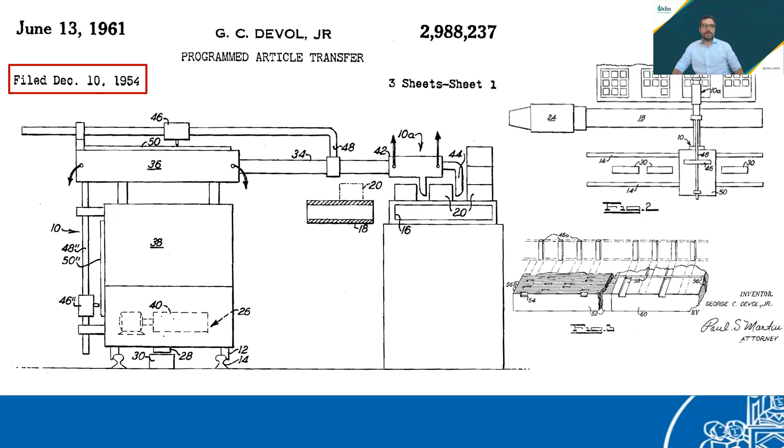This is a milestone of robotics in 1954, one of the first patents on a robot, programmed article transfer. Who is responsible for this patent? That person you see here on the right, George Devol. George Devol founded, together with Joseph Engelberger, the Unimation Inc. in 1962. Is it a great company? Yes, it's the first company in robotics, responsible for the Unimate robots.

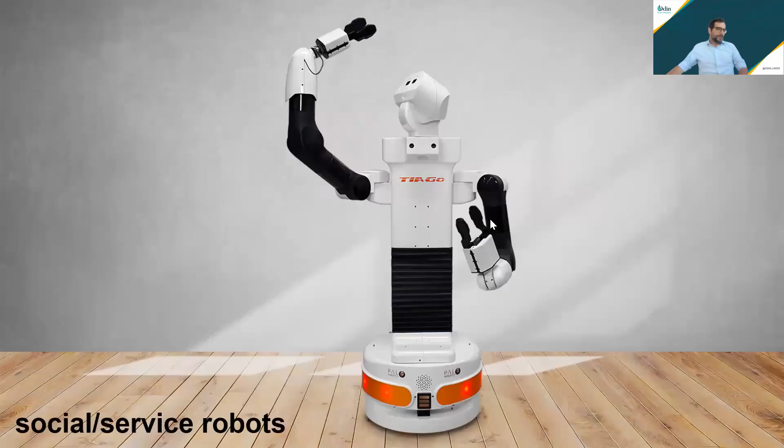The topic of this call today is not anthropomorphic robots. I will focus on social and service robots, and in particular I will provide solutions for delivering robots working in hospital environments, in order to help shape the future of the hospital.

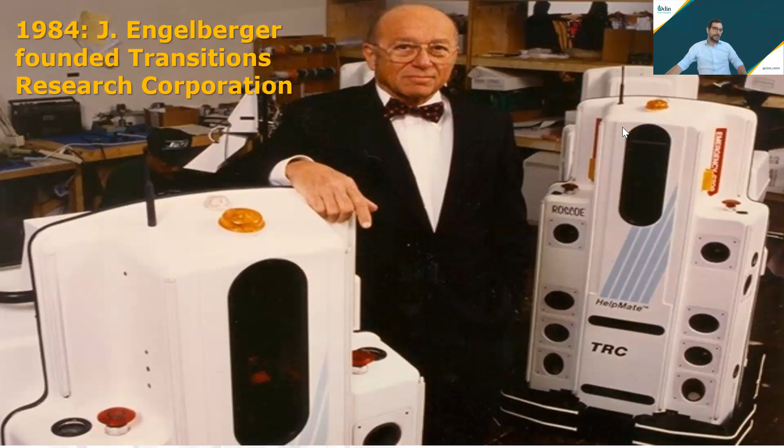Let me make a step back. This is the same person I presented before, Joseph Engelberger, who in 1984 founded another company called Transitions Research Corporation. You see on the background some mobile robots, four of them, and this is the HelpMate robot. These robots were on the floor of the company I mentioned, and this is a picture from 1993.

So why am I saying that? Because I like very much to know about history. It's important to understand the reasons why today I don't see that technology as consolidated as I would like. The question I'd like to discuss, to solve together, is: why, almost 30 years ago, did we already have great robots with functionalities for delivering consumables and items in hospitals for logistics purposes, and how do we improve them and solve the open issues that started with these robots in the past?

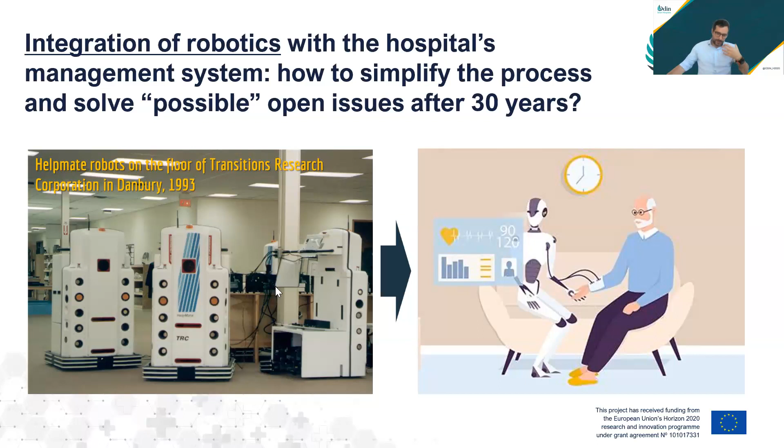So, discussing this within the ODIN consortium and with other colleagues, we decided to create, and then test in the great piloting area hospitals of the consortium, a new robot for logistics—one that is not a robot full of technologies.

It's a robot that started from a smart idea and from the needs of practitioners and hospital management systems. This is a robot integrated within the wide digital infrastructure of the ODIN European project, an example of a robotic satellite connected to the complex digital architecture that is the aim of the ODIN project.

So what are the features of this robot that are different from what's available today on the market or in research? We decided to create a smart component within a smart component. The robot itself is the system delivering what we call the smart rack, and the smart rack delivers the smart boxes. So it's a system transported by a mobile robot, and this infrastructure is generalized to be compatible with different mobile robots.

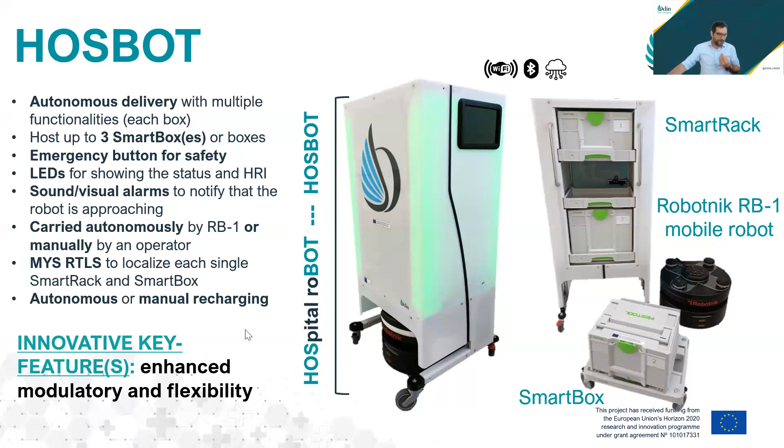To better explain the features of this system, I'll show a video that will take a few minutes of my presentation. What you see here is the use of the HOSBOT robot - yes, this is the name of the robot - in a real, realistic environment simulating a hospital scenario.

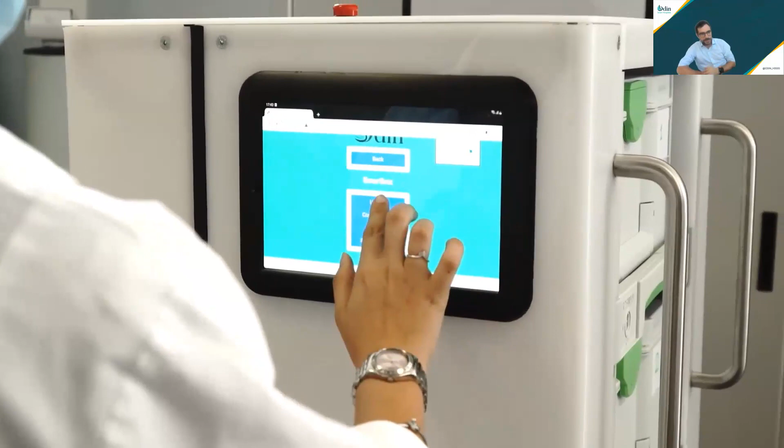As you can see here, this is just a tablet mounted on our robot, and this is the front end for connection with the ODIN infrastructure. What the doctor is doing now on our system is unlocking the box in order to have access to a secure environment.

So right now there's no robot present. The robot will come. What that person is doing now is using a smart robotized box for tracking, identifying, and loading different consumables - we're just putting in consumables that are tracked by our magic box.

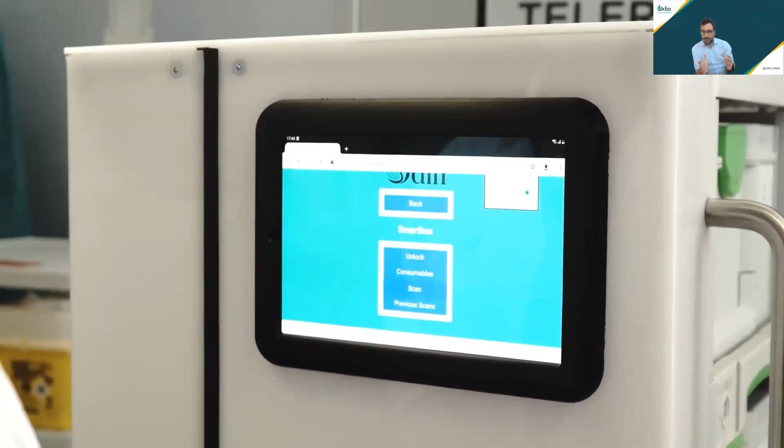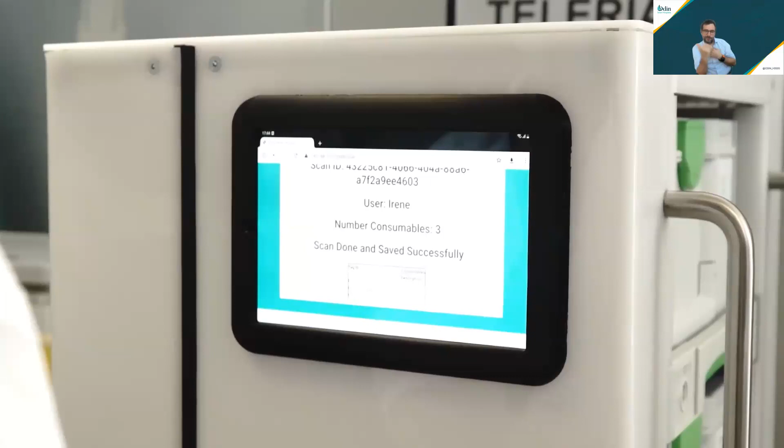The boxes we call smart boxes are part of a smart rack. Why a smart rack? Because it's the rack that powers and enables access to the different boxes. Here you see an example of adding consumables for tracking and transporting them to different wards of the hospital, planning to have the right consumable in the right place at the right time.

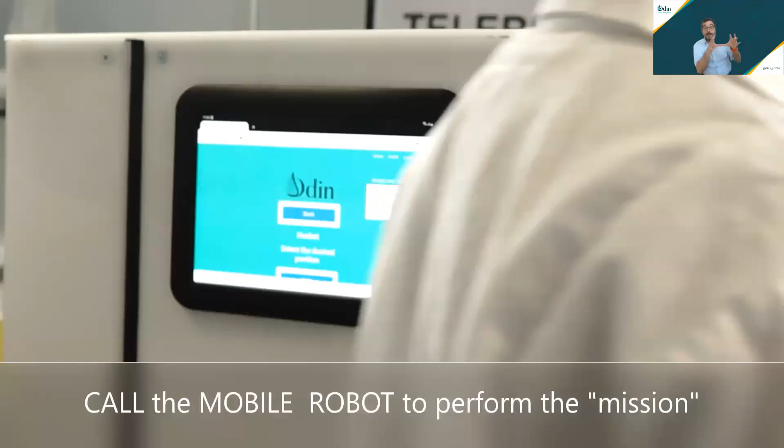But each box can have a different functionality. Now the operator calls the robot. So it's one robot for different racks - one robot serving different smart racks. Why? Because the real cost now is in the mobile robot.

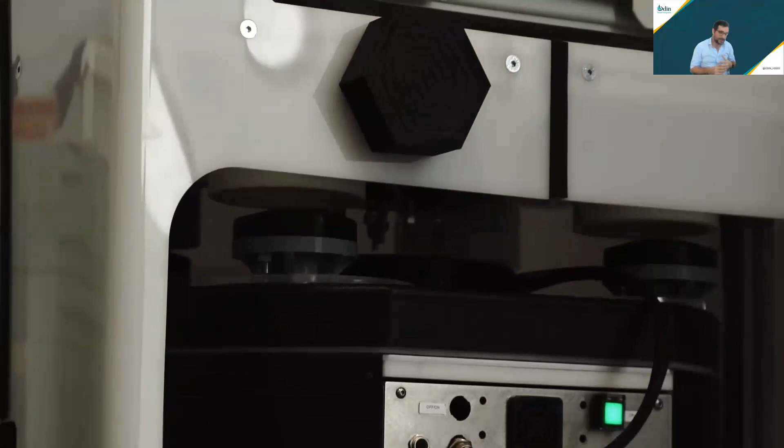And I'm sure a robot isn't working 24 hours a day, 7 days a week as the same single robot. So the smart idea was to have several low-cost smart racks and boxes that you can change as you like, and then maybe just a few mobile robots managing the different transportation tasks. That's the point.

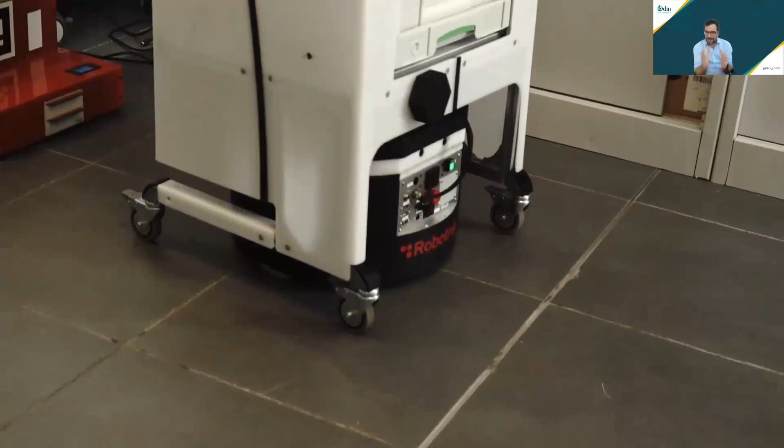We also want to increase the potential impact by reducing the barriers to entry - and cost is one of them. But not only cost, because when a director sees that the robot she purchased isn't being used, she's not happy. So we want to say: do you need one rack?

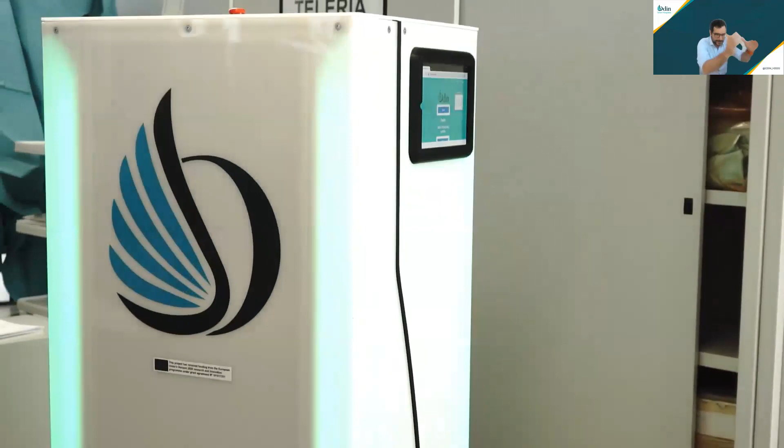Yes, take one rack, and then take one robot. If you need more racks, if you need more boxes, that's what you'll purchase - creating a proper strategy, also considering fleet management strategies to use fewer robots for more containers, more boxes, more racks.

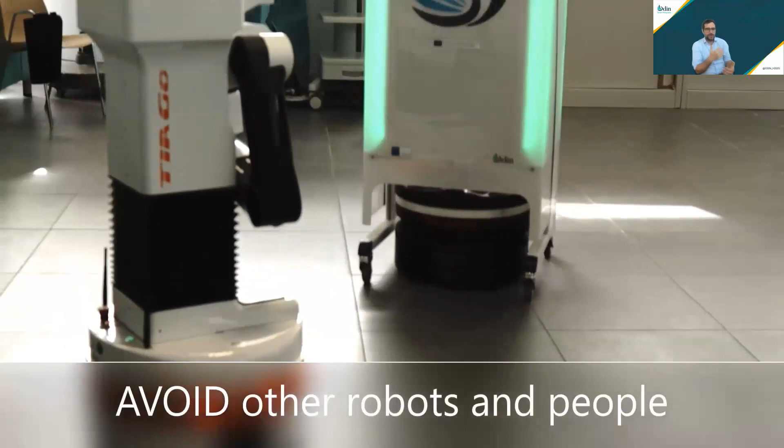The robot is of course provided with collision avoidance, so it doesn't go against other robots or against humans. It moves by replicating the behavior and speed of practitioners. We're also working on creating a proper social aura around the robot to make it compliant with a hospital environment.

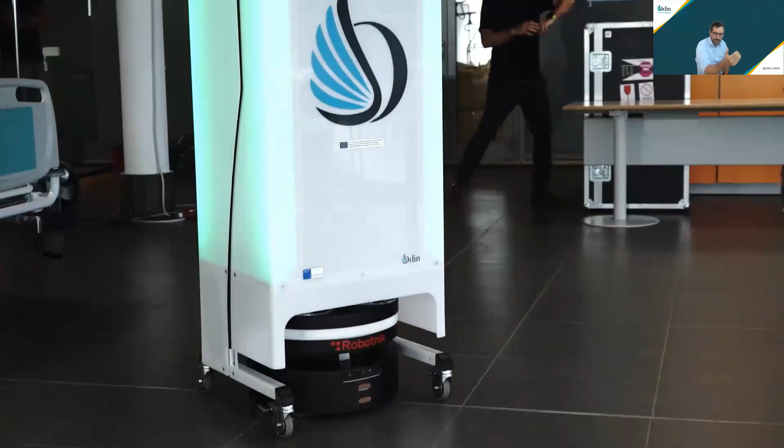What you see now is that the robot was programmed to reach another place autonomously. When the robot reaches the final place, another practitioner can go there, or may already be there, access the system, unlock the box, remove the consumable, or use the boxes as she prefers.

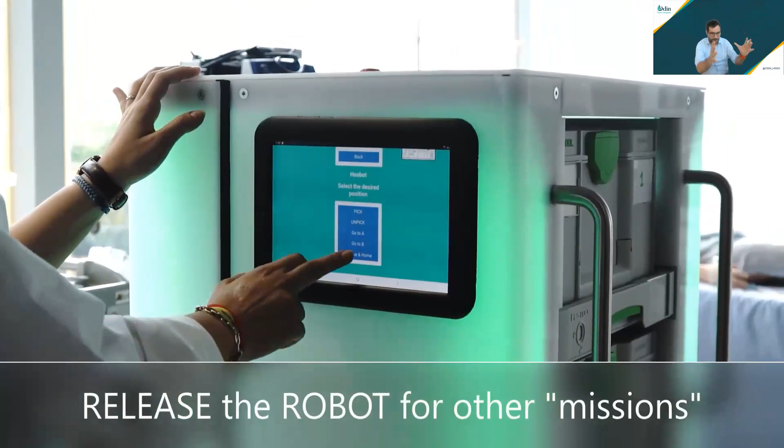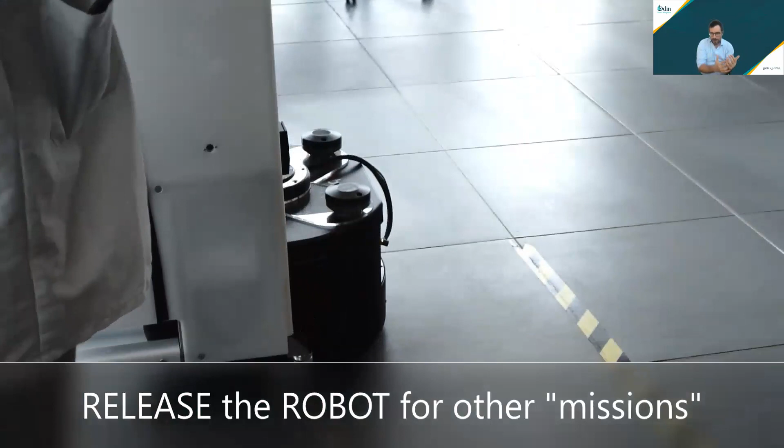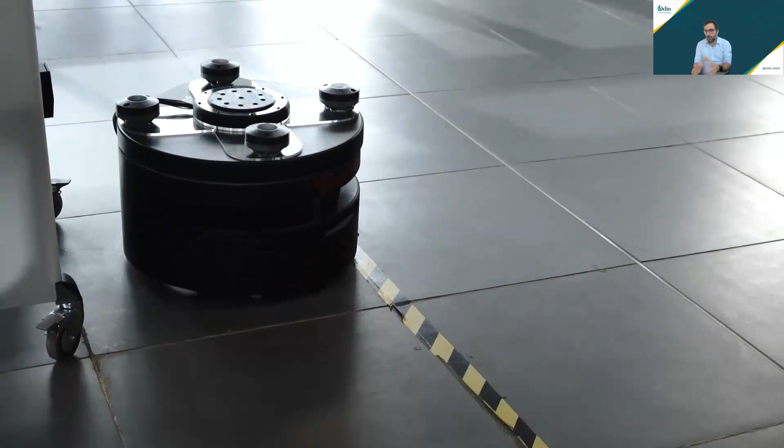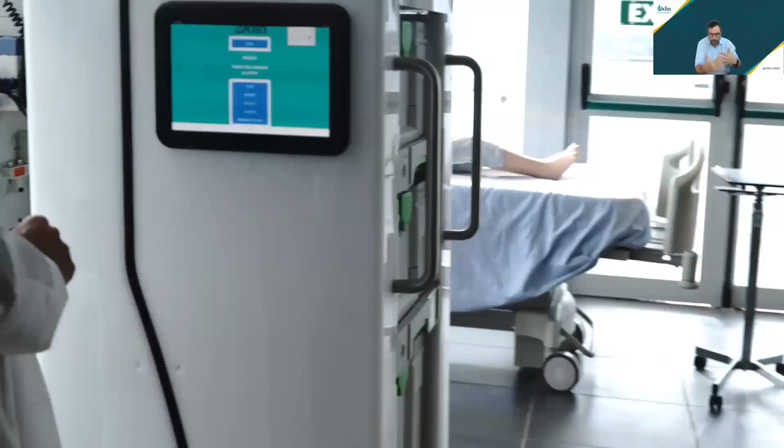So this is a description of a new conceptual design and a new way of making proper use of a robot - not having robots just because it's cool to have them, but having the least number of robotic systems within a smart integrated architecture, also considering cost and other aspects like encumbrance, to allow and improve compatibility with hospitals.

What you've seen in the video is that the robot goes off for another mission, and the practitioner can just click on the smart box, open it, remove consumables, and add new consumables - everything tracked by our digital architecture.

The smart box can be used by itself, for example as a box for last mile delivery, because sometimes a robot cannot enter rooms. So you take a box that is robotized, and you move it where you want, transporting it as you prefer.

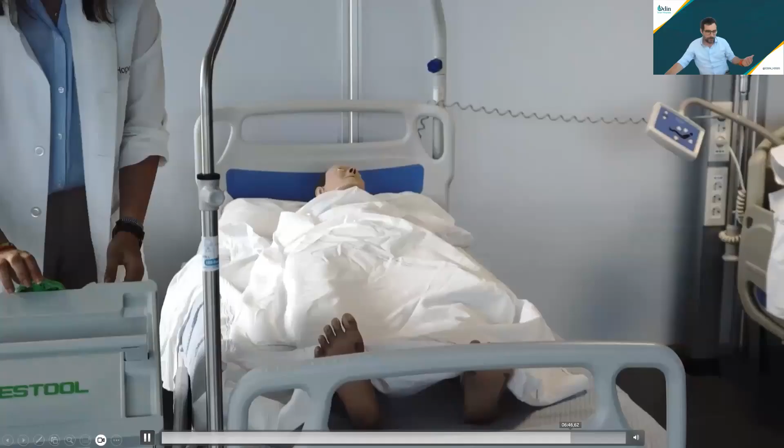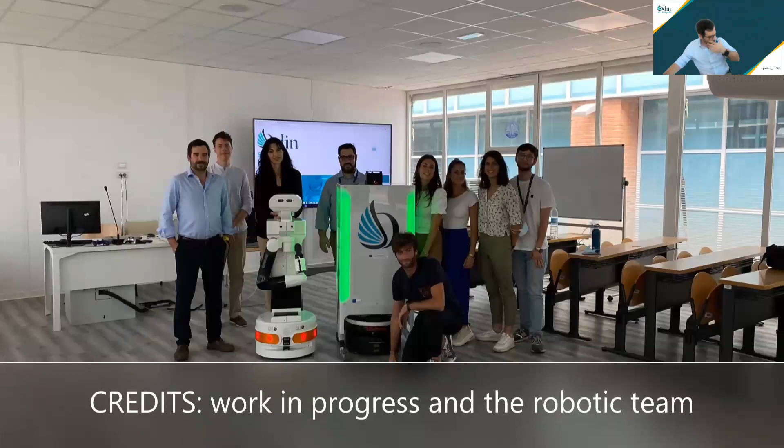Then you can move the racks, having a mobile, let's say, wardrobe, without reducing, let's say, but actually improving its usability.

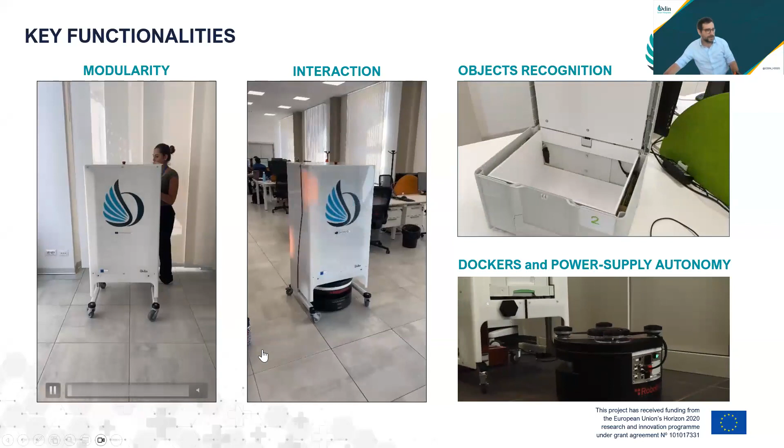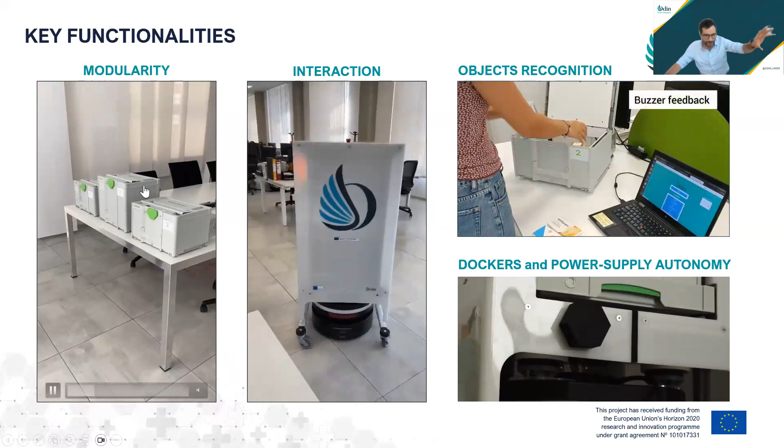So finally, what are the features in the field? We created a robot with high modularity, so you can move the rack as you prefer. You can add different boxes with different functionalities, and prepare boxes the day before, having everything ready for delivery. We also have interaction strategies, LEDs and sounds, for making the robots properly interact with users.

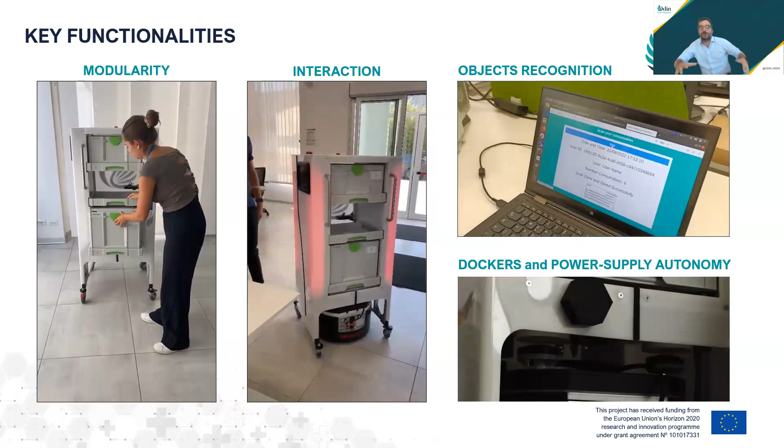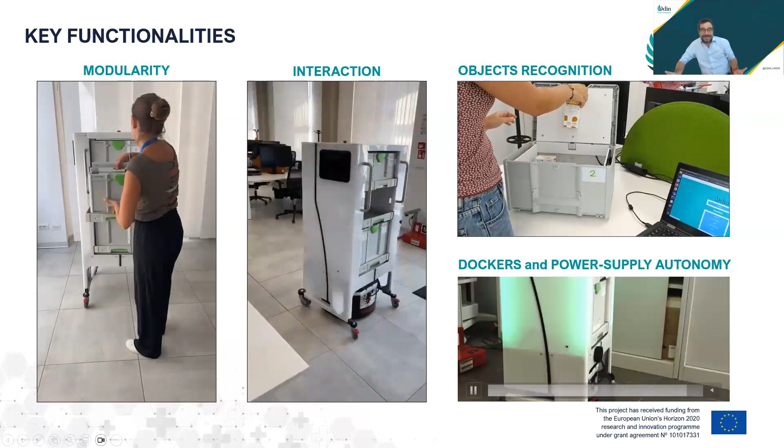We have algorithms for object recognition, making these smart boxes smart enough to recognize consumables in an easy and fast way. And we created dockers in order to make the mobile robots attach with the rack, powering the rack, powering the box, and delivering the mission.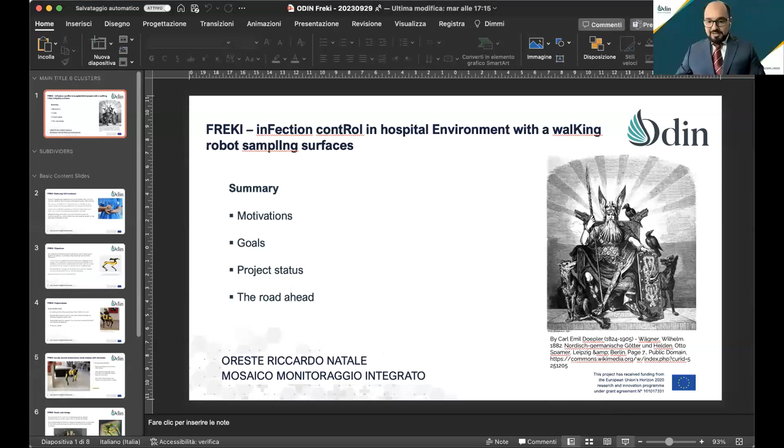I will talk now about the project we are working on within the ODIN framework. Our application is called Freki. As I will tell you in a moment, it involves the use of a mobile robot that actually resembles a dog. Freki, in mythology, is one of the two hounds of Odin, that's why we chose that name. We will talk about our motivation, our goals, where we are now along the project, and what is the road ahead.

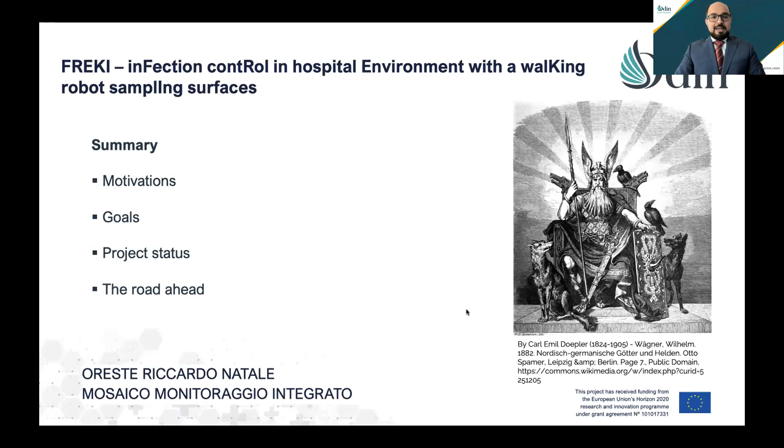The idea is that we would like to demonstrate the use of a mobile robot to help reduce the incidence of healthcare acquired infection, which is recognized as a global public health problem. Because, of every 100 patients, between 7 and 15 will contract this kind of infection, and 1 in every 10 will lose his life because of this huge issue.

One of the recognized means to reduce the impact of healthcare acquired infection is to perform analysis of samples taken by swabbing the surfaces of a healthcare facility, looking for pathogens, which are, of course, responsible for the infection.

The platform is the robot called Spot, made by Boston Dynamics, equipped with a robotic arm, because the idea is to equip the back of the robot, the shoulders of the robot, with a swab rack, which contains the swabs that the robot uses to take samples by swabbing the surfaces.

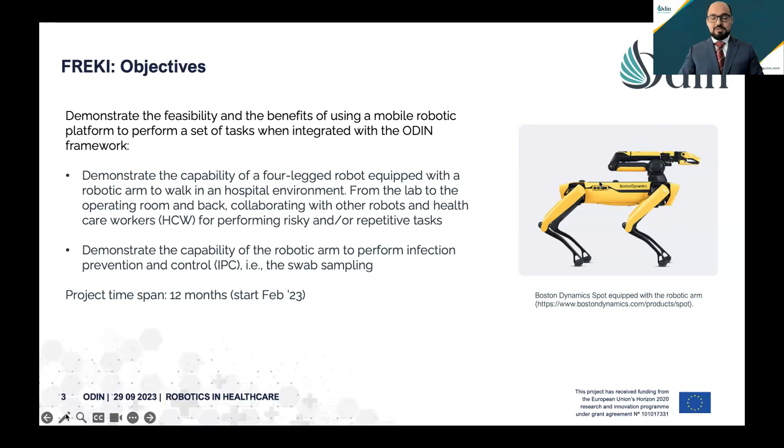What we have done so far: we have successfully tested an autonomous swab mission in our lab in a couple of cases, the simplest one where there are no obstacles, and also when there are pop-up obstacles along the mission path. That means that, using this kind of equipment, we are able to perform the mission even if along the path the robot finds obstacles that are not known in advance.

What happens is that once the area has been mapped, the robot tries to find a suitable alternative path if the nominal path is obstructed by obstacles, and if constraints are matched, the robot walks around the obstacles and moves to the sampling point, proceeding along the path to reach its destination, the place where it has to take the samples. The robot is an amazing technology because it has the ability to go wherever a human can go.

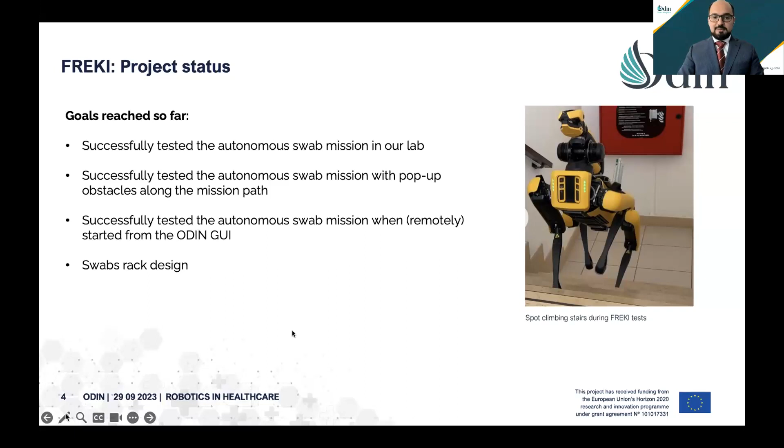It can climb stairs, it can open doors, basically moving inside or outside of buildings. Also, we are now at the step where we are designing and optimizing the swab rack, which is here on the back of the robot, so it can hold as many swabs as possible.

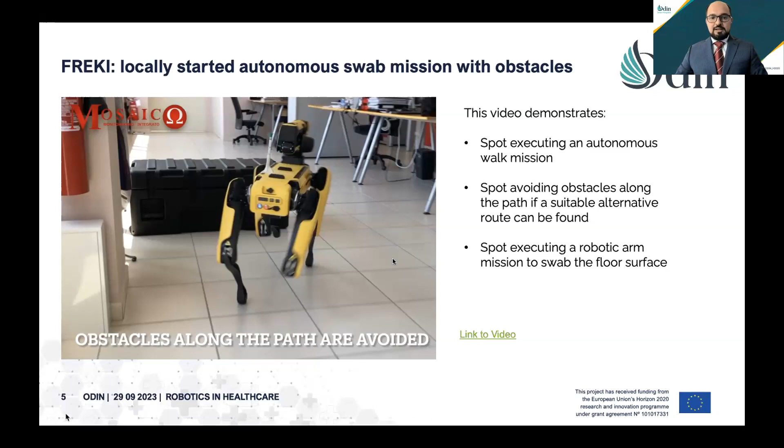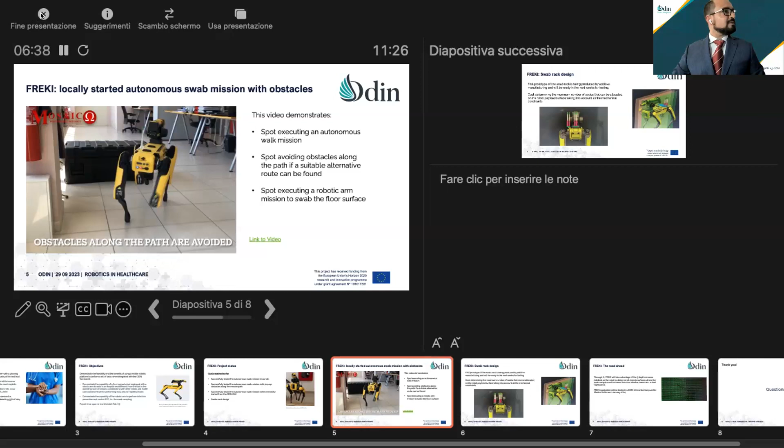I wonder if you can see the video, maybe not. No, let me try to show, share it again. No. Okay, so what I'll do now, I'll put the link to the video into the chat so that everyone can click on the link and see the video. Let me try one last time. No, it doesn't come up. Okay, so it's pretty strange right now, but if you click on the link that I placed into the chat, you can hopefully see it, but I'm not very happy about that. Let me see if I can share the whole screen. Okay, maybe sharing the whole screen, sharing the whole screen should work. Can you see the video now? No, not really. Let me make the very last attempt, then we move on.

Yes, please. The video doesn't come up. Okay, so please have a look at the link that I've shown in the chat, so that it's even available after the presentation.

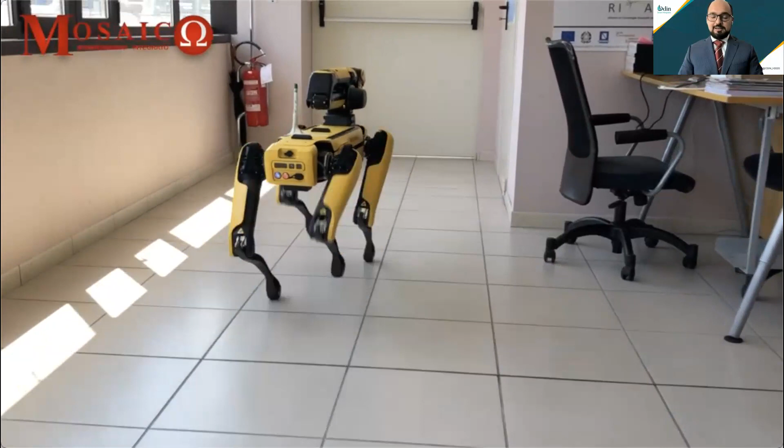As you can see in the video, if you access the link, because the presentation doesn't show up at the moment, you can see the robot performing an autonomous swab mission. Basically, the robot proceeds along the path to reach its destination, and it avoids the obstacles that it finds along the way, if there are any. Once the robot reaches the destination, it performs the swab operation using the robotic arm equipped on top of the robot.

The idea here, as you can see in the video, is that this is an early-stage prototype of the application, where there is just one swab equipped on top. The idea, as I will show you in a minute, is to equip the robot with a swab rack which can hold as many swabs as possible, which in this first iteration should be a maximum of 12.

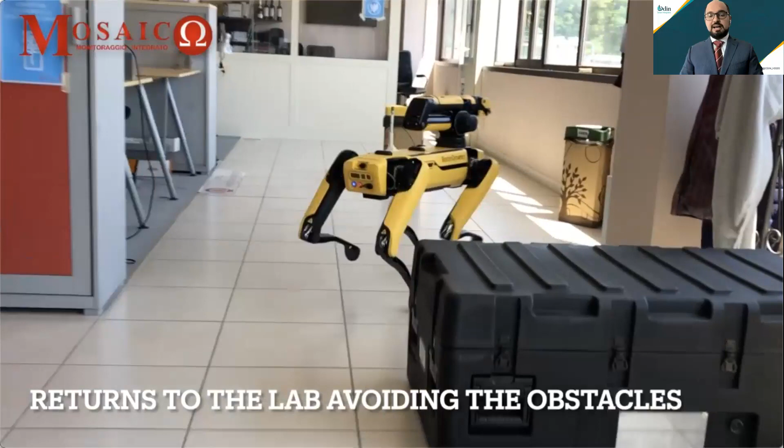The idea is that the robot proceeds along the path and performs all the swabs in the designated area, and then walks back to the lab to have those samples analyzed to look for pathogens.

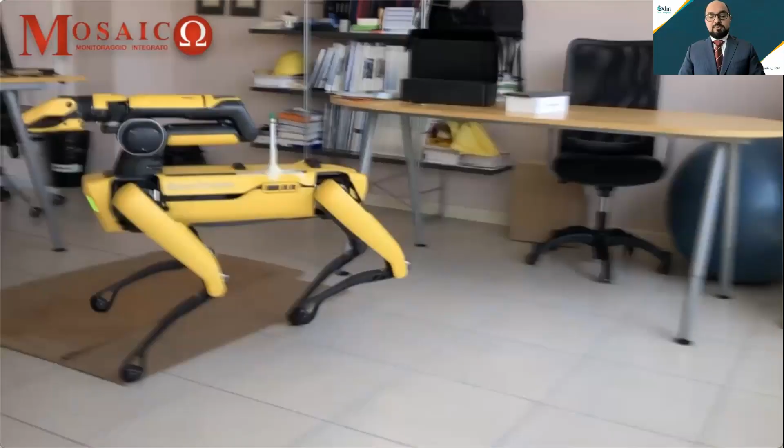Again, if the robot finds obstacles along the way, it tries to find an alternative path. If physical constraints are matched, the robot finds alternative paths. Otherwise, it just stays still, notifying the problem and waiting for the obstacles to move away.

Let me go back to the presentation. Hopefully it will go back to the presentation. I think something happened, because I see that I'm sharing the screen, but nothing is shown. Is that correct, Marta?

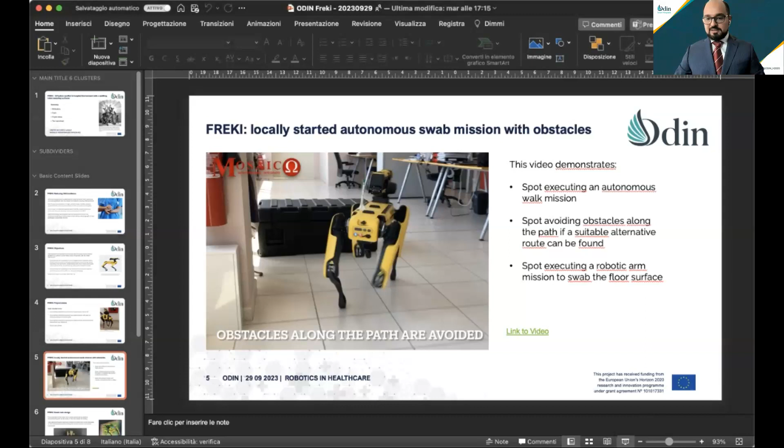I can see your presentation, but not in presentation mode. I don't know. Okay, let me start like this. Okay, now it should be in presentation mode.

Okay, so one of the last things I'd like to show is the swab rack we are designing now, which should be able to hold between 6 and 12, it depends—we have to test it. The idea is to make the mission as efficient as possible, putting as many swabs as possible on the back of the robot, between 6 and 12.

We didn't make it ready for today's presentation, but that's the design, and next week it should be tested. The last thing I'd like to talk about is the road ahead.

As you may have seen in the video at the link I put in the chat, the robot takes samples of the floor. The floor is a surface where pathogens can be found, but we need to look for more specific surfaces inside healthcare facilities, which are smaller and difficult to sample—door handles, handrails, bed nightstands, or basically any surfaces that healthcare workers, patients, or family members can touch.

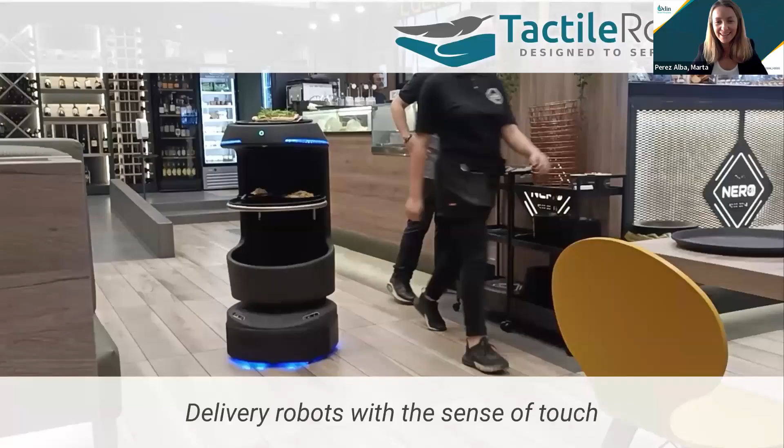Hi everybody, can you hear me? Okay, thank you very much for having invited me. I'm Riccardo Tornese, I'm the founder of Tactile Robots. We do delivery robots with the sense of touch.

This is our range of products at the moment. We have a generic base with differential drive, on top of which we have a body designed for deliveries in restaurants. But the base is a general purpose base, so it can be used for several applications, and we are also offering custom designs based on what you see on the right, but customized in terms of shape, width, length, and height, in order to fit the specific needs of each application.

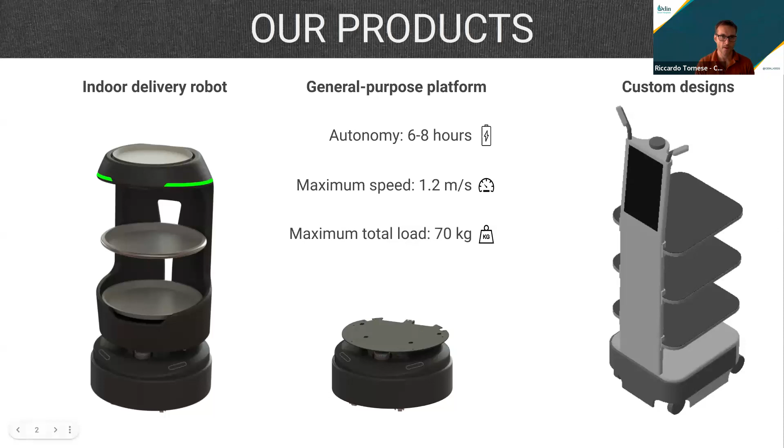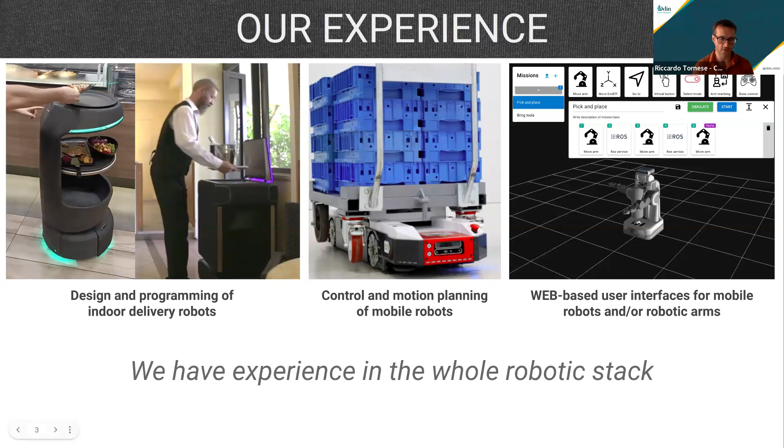We have experience in designing and programming mobile robots, so the electronics, the mechanics, and the software at the different stacks, also the user interface.

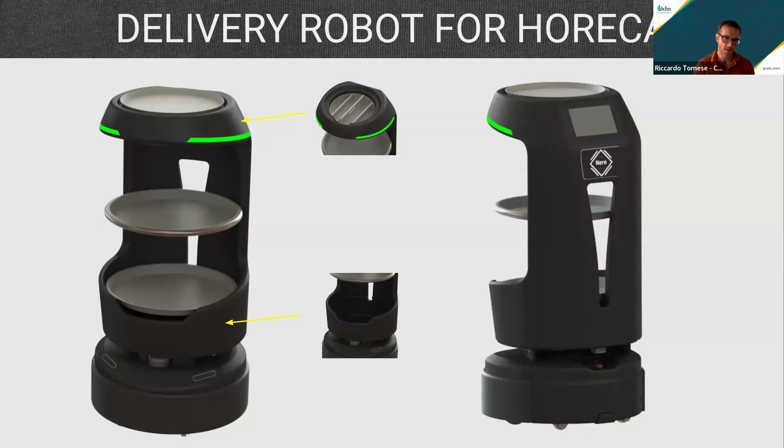Let's take a look a bit at our current product. It's a delivery robot for hotels and restaurants with a screen for user interaction, and it is capable of moving safely thanks to 3D cameras and a LiDAR. It has no blind spots, and it is capable of calibrating the position of the sensors in an autonomous way.

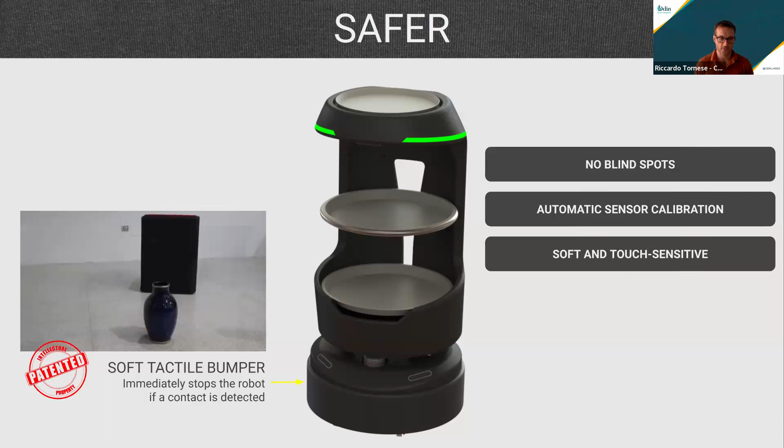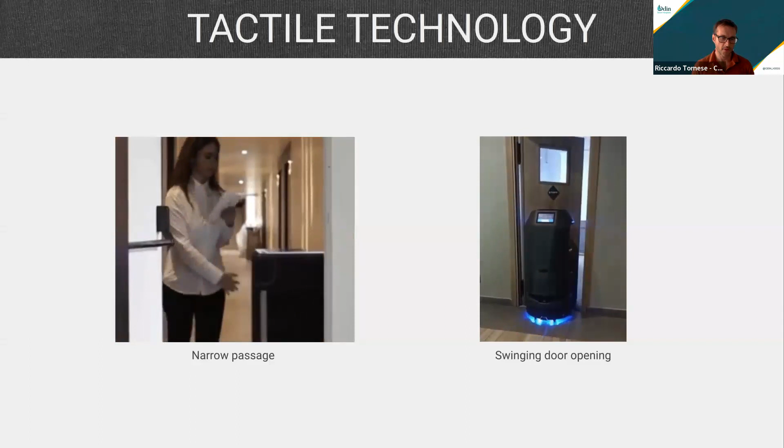It has a very special feature that is the characteristic of our robots, which is having the sense of touch. In particular, in the bottom you can find a tactile sensor, which is a kind of smart soft bumper that can feel the pressure and identify the point of contact. We have patented a way to interact with the robot thanks to this technology, an example of which is the image you see on the left, a preview prototype for room delivery in hotels.

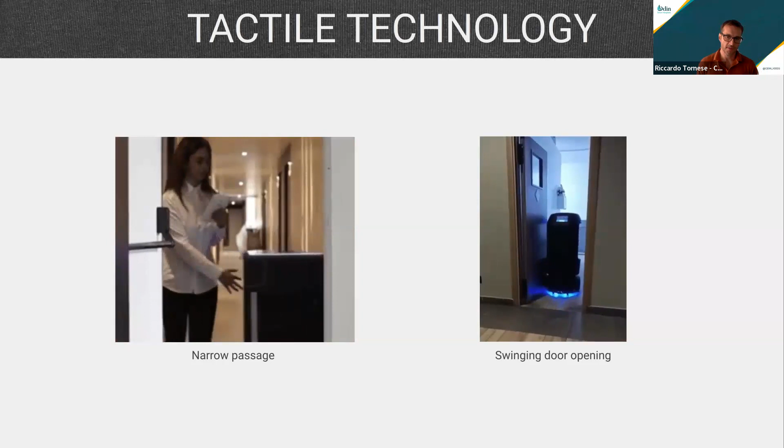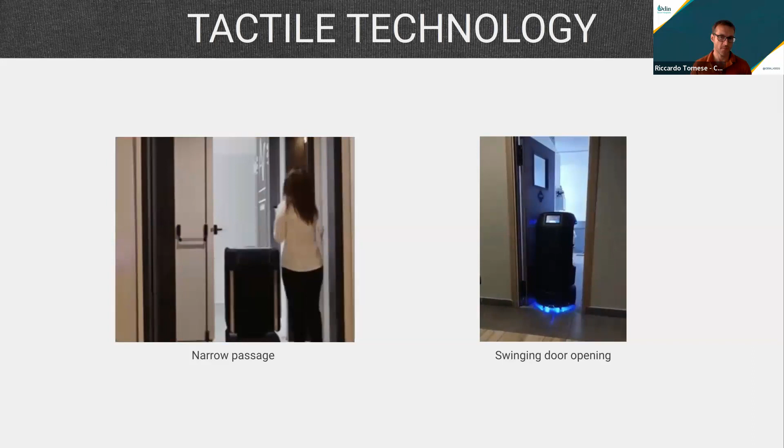But we are finding new applications of our technology. For instance, one is to enter the kitchen by passing through the swinging doors. This is something that normally cannot be done by other robots, except if you install a specific automation system, so you need a motor, a sensor, and a way of communicating. It's quite complicated and expensive, so actually deliveries into the kitchen are not even done.

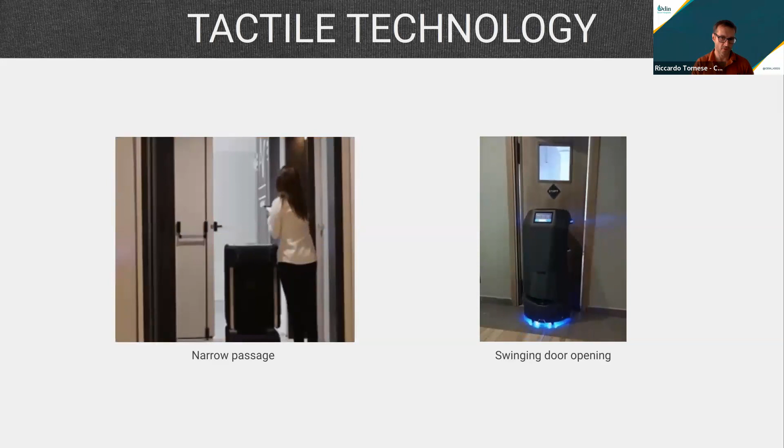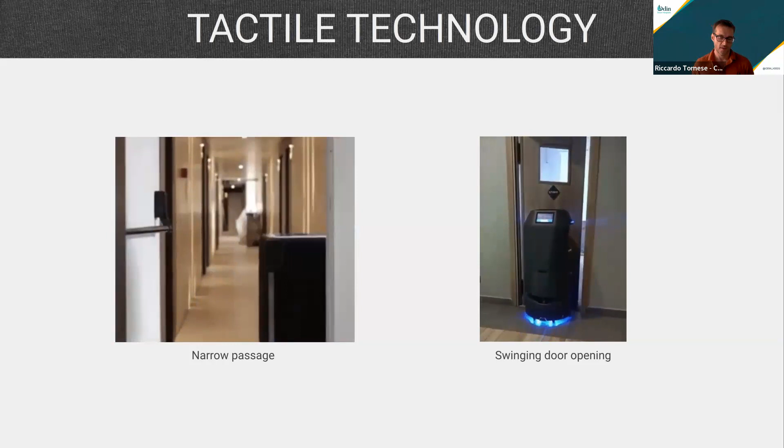So the use case of clearing tables is not really exploited up to now by existing robots. On the contrary, thanks to our technology, the robot can get in contact with the door without scratches, because the bumper is soft and covered by a textile made for resisting the contact. You can also feel the force applied, so that if there is something or somebody behind the door, the robot stops and becomes compliant, so the person can safely move the robot away.

This is one use case for this robot in the HoReCa field, which is deliveries to the table. The staff fills the robot with everything that should be delivered, sets the destination, and the robot goes to the right table. Then the client can take food by himself, or the waiter can serve people, and then the robot goes back to the base.

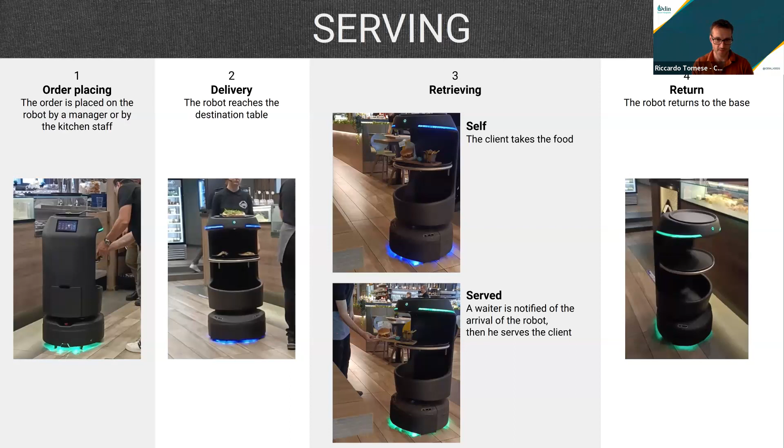There are many variations of this. The robot can take different paths, or it can just stay. So there are a lot of ways to use the robot.

Another use case is clearing. There are two use cases we have identified. One is that the waiter calls the robot to a specific table so it can clear the table, and then the robot goes to the kitchen where it is cleared by the kitchen staff. Or the robot can go on a path continuously and then go to the kitchen, so that the staff who stays in the kitchen can fill in the robot, and the staff at the tables can fill in the robot, and then in the kitchen the staff can clean it.

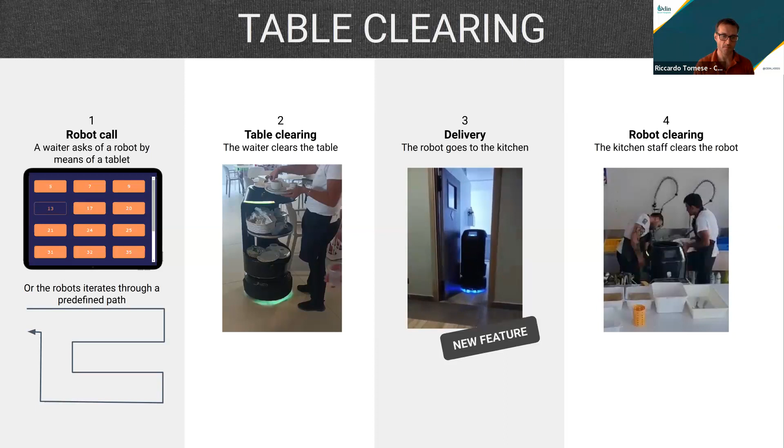But we are moving to a next step, where we combine our new design of robot, which has a bigger screen and lower costs, with other technologies such as artificial intelligence, speech synthesis and recognition, and even payments for some specific use cases, so that we can have a robot that is a delivery robot, but also a social robot. So we can expand much more the use cases of this robot in the HoReCa field.

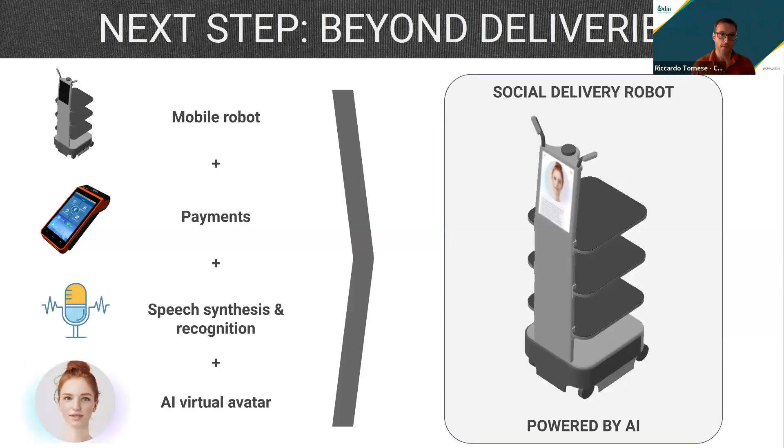From my experience, one application could be delivery of meals, mainly outside of meal time. When patients need something outside lunchtime, dinner or breakfast, it may be complicated to take food from the kitchen or warehouse to the patient because the distances are very big, and an automated solution could help a lot.

Or the delivery of drugs, medicines, and even heavy equipment for the staff, helping them avoid effort. Also, tactile technology can be a significant plus, because when the environment is very narrow and crowded, having the possibility to nudge a robot with a light touch, or to stop it and let people pass, can be a big advantage.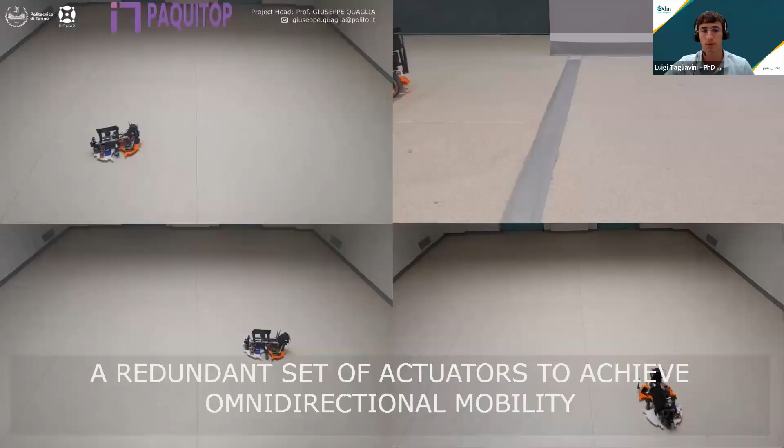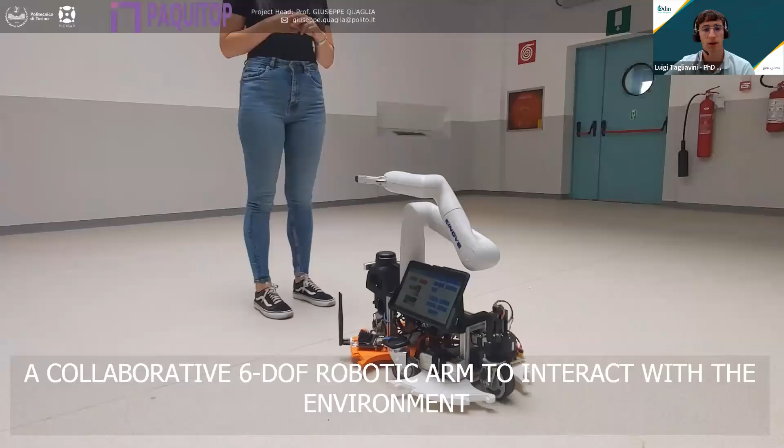Here we would like to share a brief video of our robot called PAQUITOP. I hope the video is not too laggy. The robot has a compact size to navigate within indoor environments. It's provided with an omnidirectional base, and on this base platform we installed a collaborative robotic arm to interact with the surrounding environment. Moreover, specific sensors and tools can be mounted on the robot based on the specific application we want to address.

Here I want to share a more detailed description of the robot's components. As I said before, the main peculiarity of this robot is that the base platform can move in any direction in the plane of motion. We achieve this omnidirectional mobility using conventional wheels, to avoid problems related to other wheel types, like mecanum wheels and omni wheels, which are strongly affected by ground unevenness and small steps.

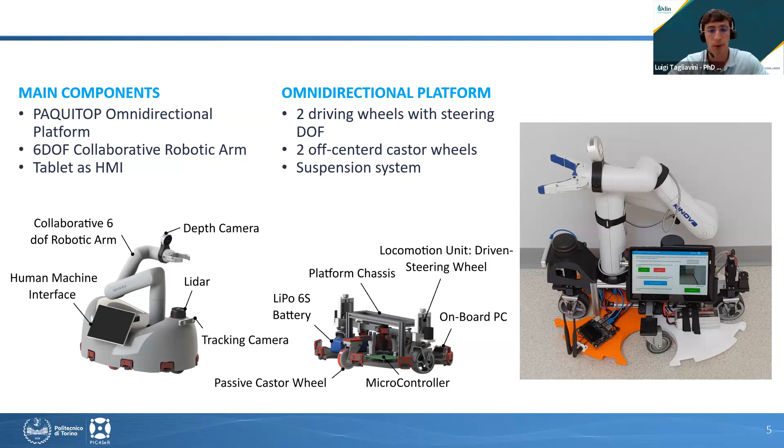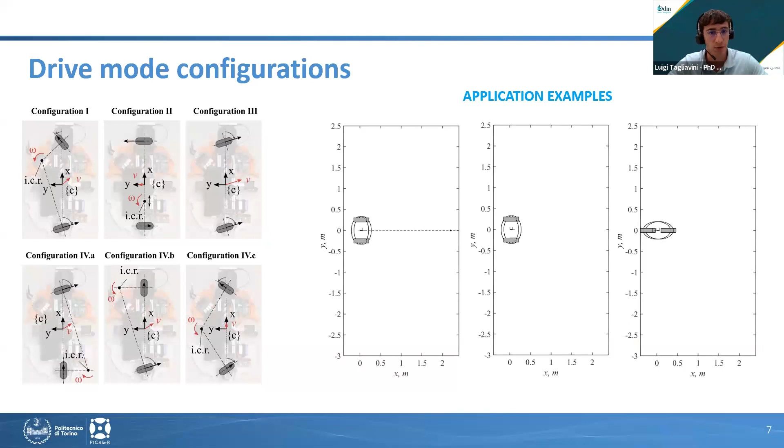To achieve this omnidirectional mobility, we used two motor wheels mounted on two vertical steering axes. By controlling these actuators, we can implement different mode configurations for driving the robot, and with this locomotion system we can achieve complex movements, like the ones you can see in these animations.

Today, I would like to talk about a project we developed in collaboration with the nonprofit organization Fondazione DOT and the Molinette staff at the hospital here in Turin. The project's goal is to test the effectiveness of a robotic assistant like PAQUITOP in a hospital environment, to lower the job pressure on healthcare staff while also improving the collection of patients' body parameters.

Together with our partners, we identified two applications for the PAQUITOP robot. The first uses the robot as an assistant in the blood bank of the hospital, while the second deals with the transportation of materials around the hospital ward. We decided to focus on the first one since we also wanted to test the robot's capability at interacting with patients.

Before customizing the robot for this specific application, we decided to focus on the main problems we can find in the blood bank of the hospital. The first one is that multiple matching checks between blood bags and patients are needed to ensure safety, and this is an easy task that can be automated. So this is the first task we want to address.

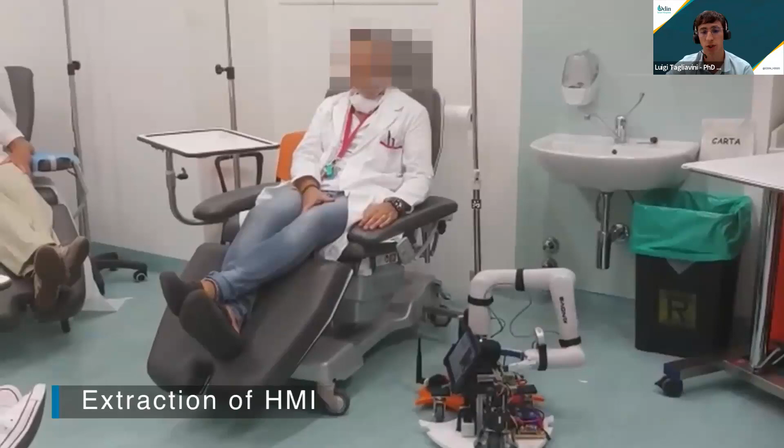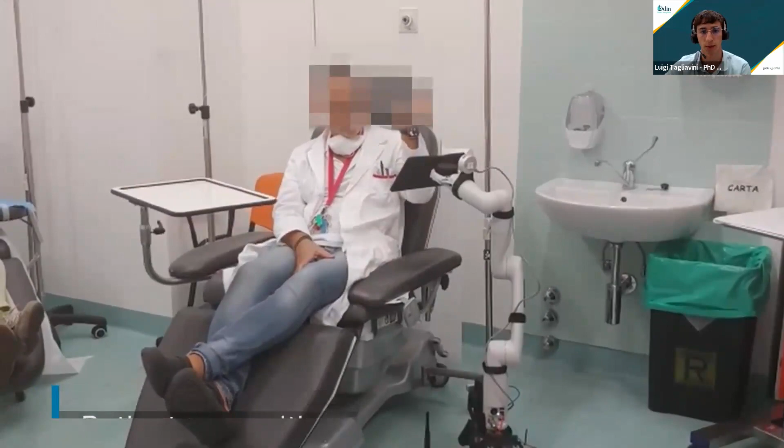First, the robot detects the tag of the blood bag. Then it extracts the human-machine interface, developed on a tablet, and positions it dynamically in a way that is comfortable for the user to work with. Then the patient is identified and can interact with the machine using the tablet. Then the robot retracts the human-machine interface and moves to the next station.

This is performed all autonomously for now, even if we need to improve the 3D map for obstacle avoidance using the robotic arm. After all the stations are completed, the platform returns to its charging station.

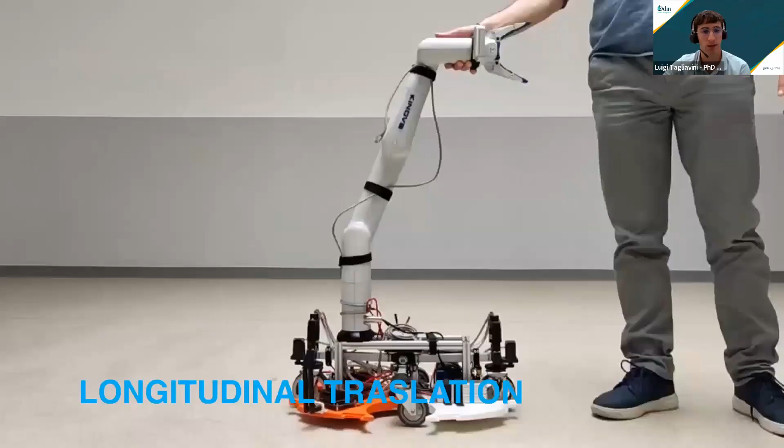While working on this project at the hospital, we decided to investigate alternative interfaces to drive the robotic platform, since ideally no training should be needed to drive the robotic system.

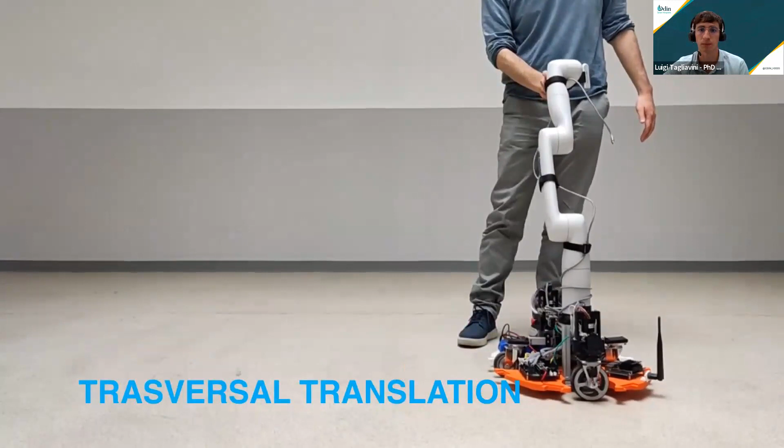To do this, we implemented force control of the robot. In this video you can see Lorenzo, my colleague, applying small forces on the tip of the end effector of the robot. By measuring the currents of the motors of the robotic arm, and using a particular algorithm, we are able to estimate the forces the user is applying on the robotic arm.

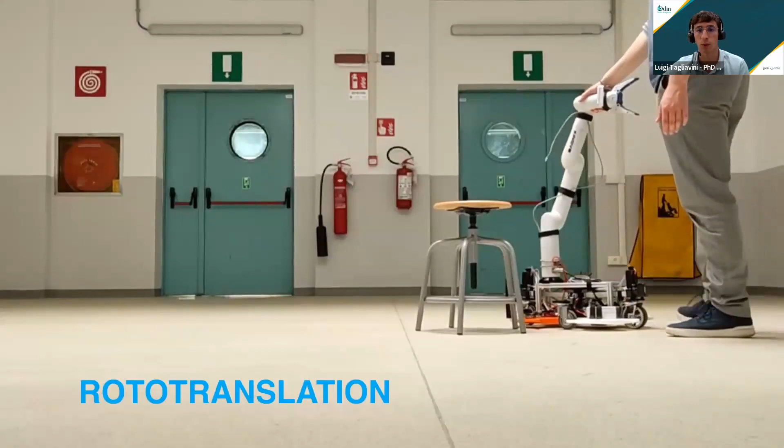These forces are then transformed into velocity commands for the base platform. In this way we wanted to achieve a simple way to drive the platform around, save the position of the transfusional seat, and plan the entire task.

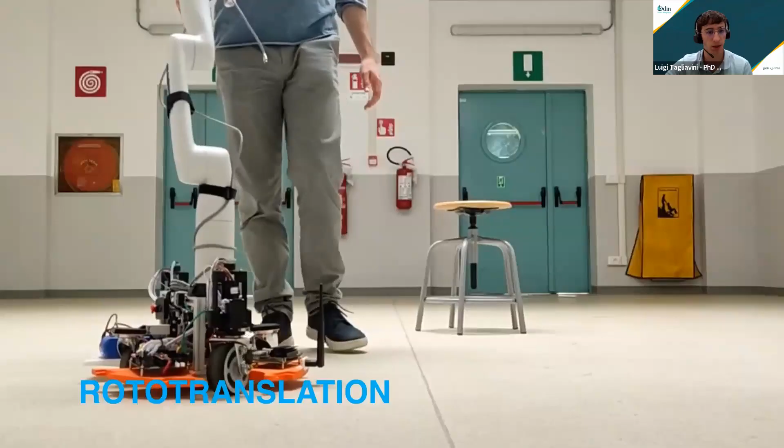So this was my presentation. I hope this was interesting for you. For future applications, we are looking forward to other fields of application for this robot. A thing I want to underline is that to fully exploit all the functionality of this kind of robot, a complete integration between the robotic system and the informatic infrastructure of the hospital is fundamental. I think ODIN is moving in that direction.